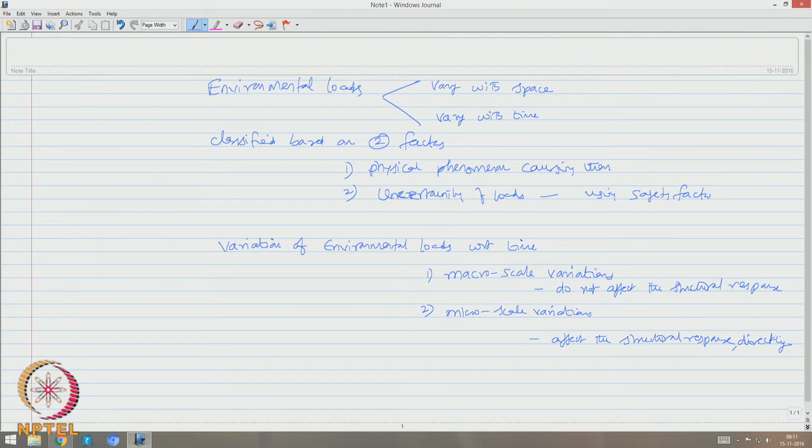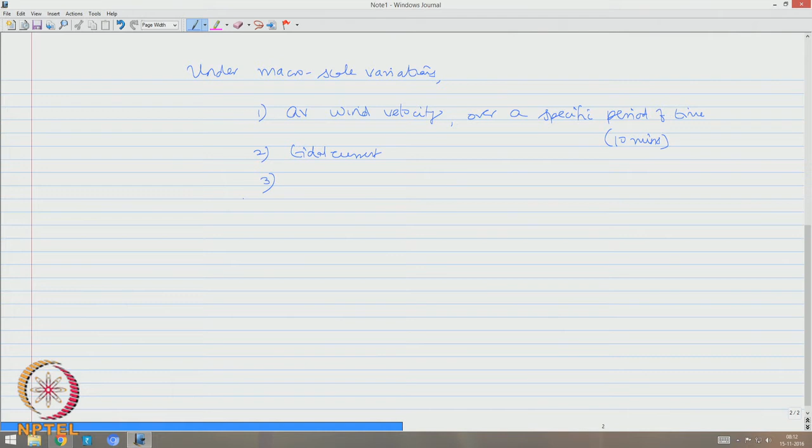Under macro scale variations, we can give certain examples. Let us say average wind velocity over a specific period of time; usually this duration of loading is about 10 minutes. The second variation in macro scale could be tidal current, it could be significant wave height, and peak period of the wave spectrum.

The fourth could be peak ground acceleration of the earthquake motion. So, they all come under what we call macro scale variation. They do not actually have direct influence on the response of the structural system.

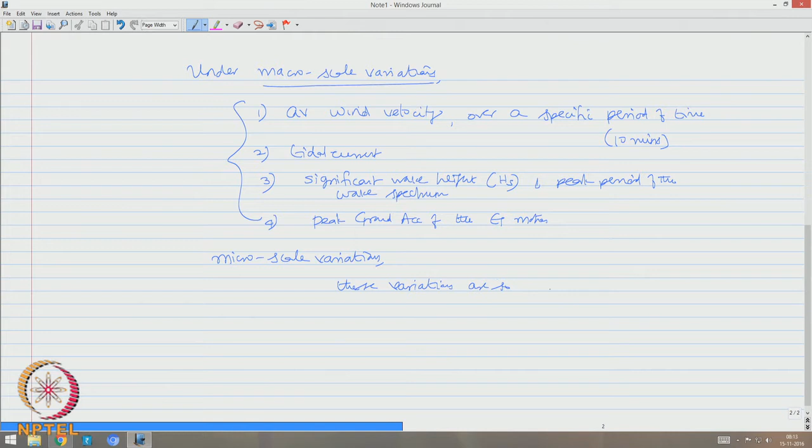On the contrary, if you look at microscale variations, these variations are so rapid that it makes significant influence on the response of the structure, let us say in our case the platform. Generally, microscale variations give rise to dynamic effects on the platform.

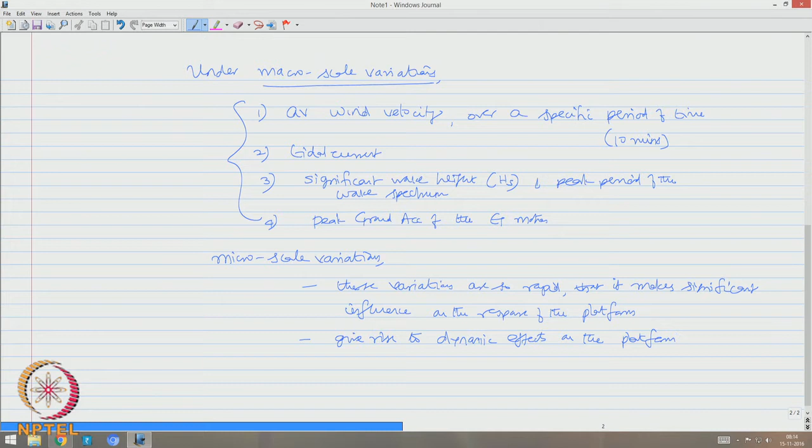Let us enter conventional environmental loads. Let us talk about wave loads. The wind generated sea surface waves can be represented by a combination of regular waves. So, what may be a combination? Regular waves of different amplitude, different period and different wave directions are combined to represent the wave load acting on offshore platforms.

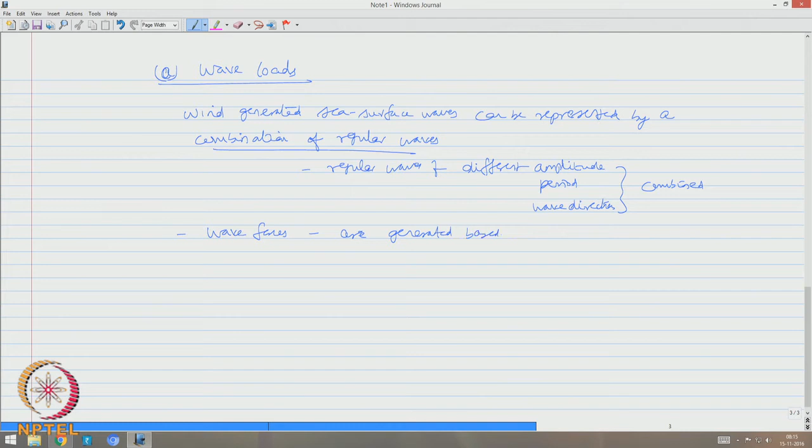The question comes, how actually they are represented? Wave forces are generated based on the water particle kinematics like horizontal water particle velocity, horizontal water particle acceleration, vertical water particle velocity, vertical water particle acceleration. The foremost theory which we all know is Airy's theory. This is also called as linear wave theory.

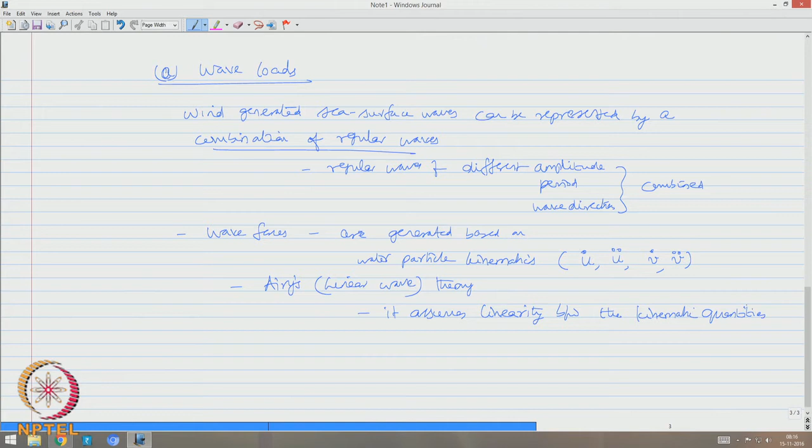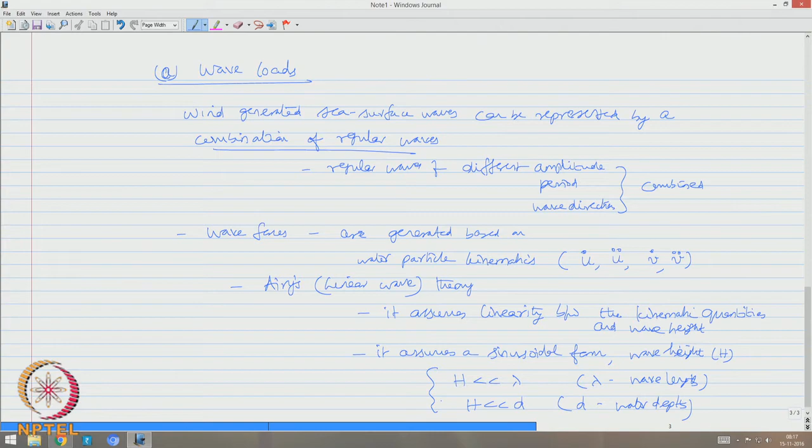Because it assumes linearity between the kinematic quantities and wave height. It usually assumes a sinusoidal form with wave height h which is very small compared to wavelength lambda, and very small compared to water depth. So, these are some basic assumptions which classify Airy's theory as linear wave theory.

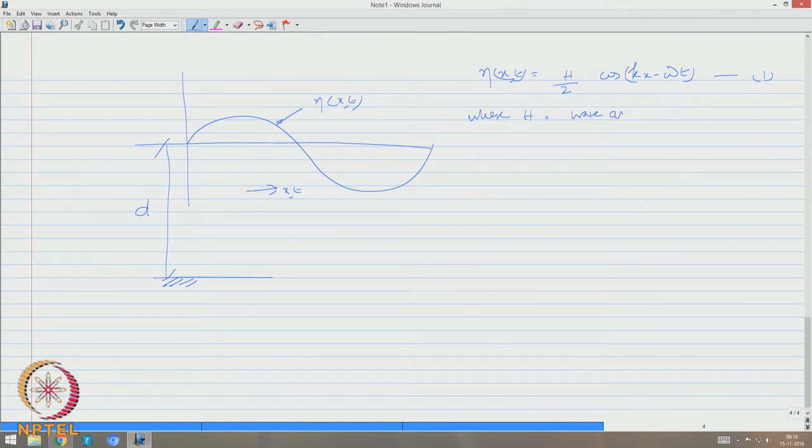So, according to this theory, if the sea surface profile is explained as a sinusoidal wave, with the water depth represented as small d, the sea surface elevation eta, where x and t vary in space and time, is given by, where h is the wave amplitude, k is called wave number, which is generally given by 2 pi by lambda, where lambda is called wavelength, which is approximately 1.56 T squared, where T is called wave period,

omega is wave frequency, which is 2 pi by T, and Cp is called phase speed, which is omega by k, which is lambda by T. Once I know the sea surface profile, as the water particle moves horizontally in x with respect to space and time t, because of the wind action on sea surface elevation, they generate horizontal water particle velocity and vertical water particle velocity, let us say in meter per second.

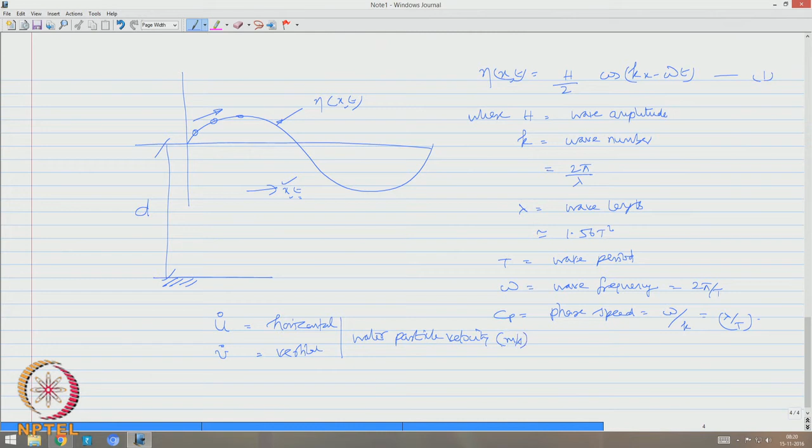Horizontal water particle velocity is given by omega h by 2, cos hyperbolic k y by sin hyperbolic k d, cos (k x minus omega t). Vertical water particle velocity is given by omega h by 2, sin hyperbolic k y by sin hyperbolic k d, sin (k x minus omega t).

Differentiating this with respect to time, we get horizontal water particle acceleration, which is omega squared h by 2; of course cos hyperbolic k y and sin hyperbolic k d will remain unchanged. There is a minus sign and that becomes sin (k x minus omega t). There is another minus sign with this omega, that becomes plus an omega squared. Whereas v double dot of t is minus omega h by 2 sin hyperbolic k y by sin hyperbolic k d of cos (k x minus omega t).

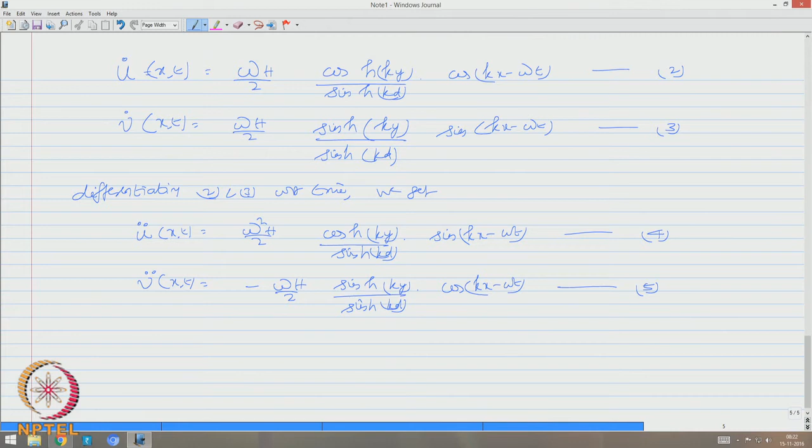So, there are some limitations where this theory can be applied. Airy's theory is valid only up to mean sea level, but interestingly there is a complexity here. When you have a cylinder or a leg of a platform whose diameter is very large, there may be a possibility part of the wave may be in submerged position with respect to the cylinder. So, there is a possibility that the cylinder may occupy a position which may be in the trough part.

So, the differential submergence effect of the cylinder with respect to the mean sea level is not accounted. So, we call it variable submergence effect, because Airy's theory computes the water particle kinematics only up to mean sea level. The variation because of the sea surface elevation with respect to the mean sea level is not accounted in Airy's theory.

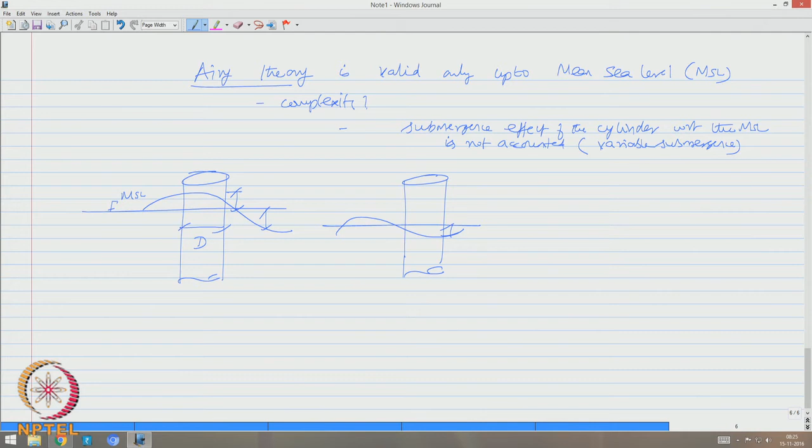In that case, the solution is, people have used something called stretching modifications. This will account for water particle kinematics up to the actual level of submergence.

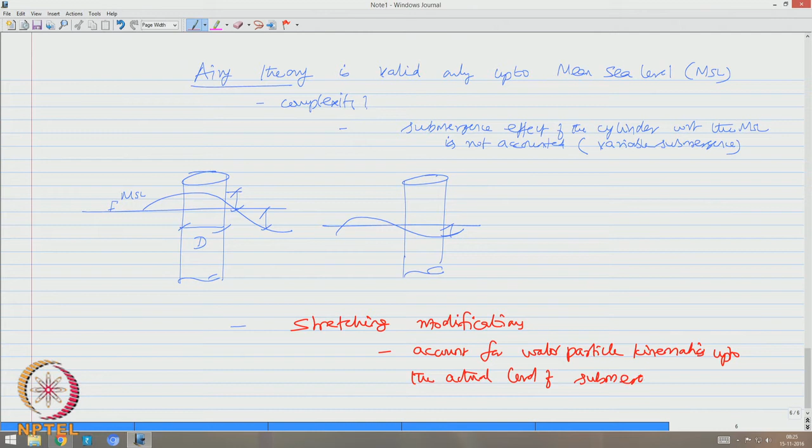Before that, let us see some classical definitions, which again show complexities in defining these wave theories. There are some classifications in the literature as deep water, shallow water and intermediate water depth. The classical definition says, if the water depth is greater than lambda by 2, where lambda is the wavelength, then we call this deep water. The characteristic of deep water is that phase speed, Cp, that is omega by k, is independent of depth under this condition.

Shallow water, classically, is when the water depth is less than lambda by 20. The characteristic of this is that phase speed depends only on water depth, but it is not a function of lambda. In case of intermediate water depth, the definition says it is between these two values. In this case, phase speed will be influenced by both water depth and period or wavelength.

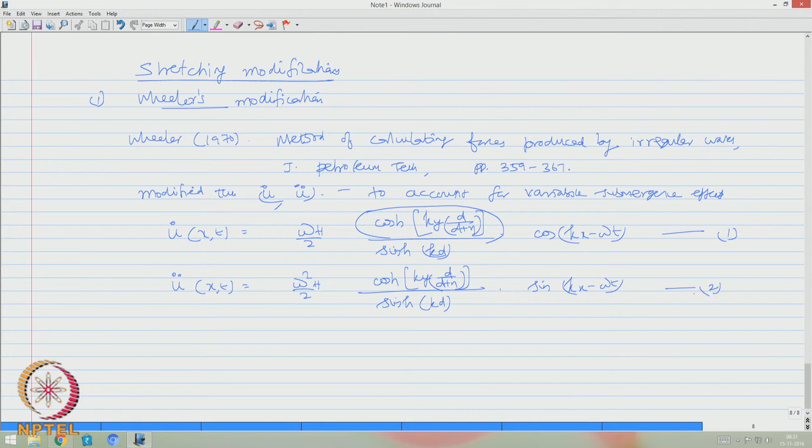So, you can very well see this is the modification which has happened, and the acceleration part: omega square H by 2, cos hyperbolic k y d by d plus eta, sin hyperbolic k d, sin k x minus omega t, where this is my sea surface elevation, y is measured from here, this is my sea bed, this is my water depth d, and this is eta, the sea surface profile, which is used here.

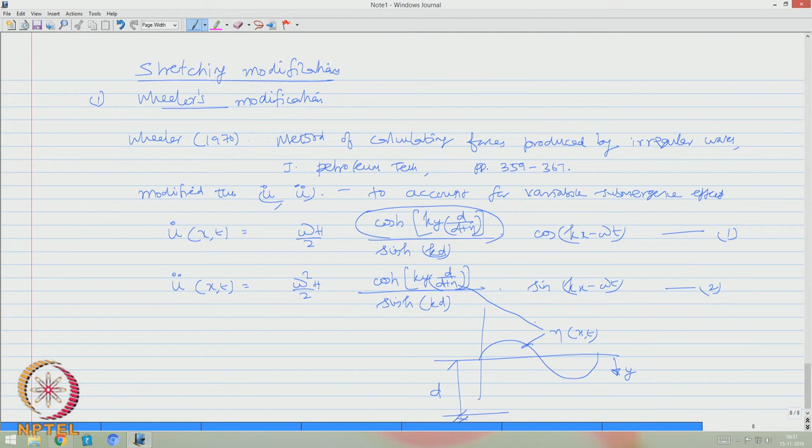The second modification was given by Chakrabarti, called Chakrabarti's modification. This was given by S. K. Chakrabarti in 1971: Discussion of dynamics of single point moorings in deep water, Journal of Waterways, Harbour and Coastal Engineering Division, ASCE 97, WW3, 588 to 590.

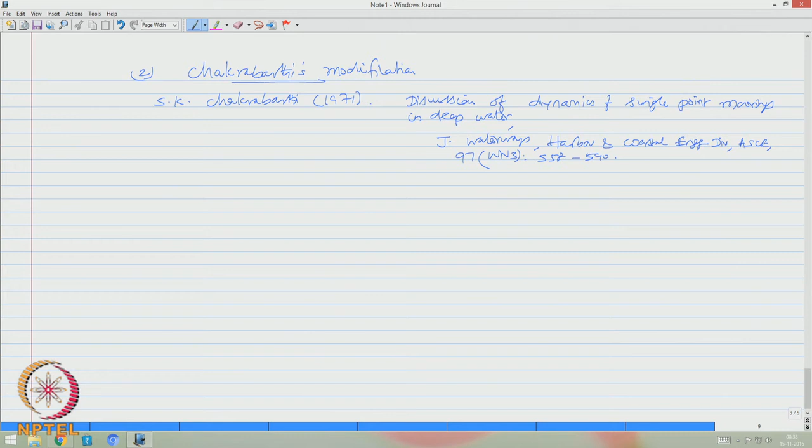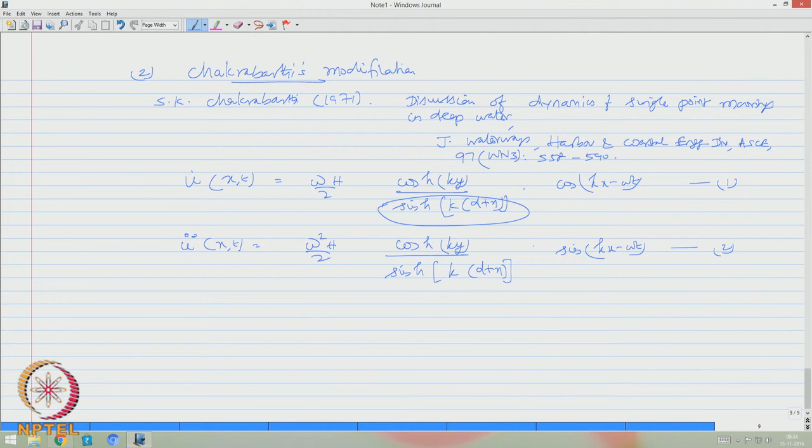According to this modification suggested by Chakrabarti in 1971, the horizontal water particle velocity is modified as this. So, the modification is in the denominator as you see from this equation, differentiating to get the acceleration. We get two equations suggested by Chakrabarti's modification. Now, interestingly, let us extend this discussion to understand the further complexities in wave loads.

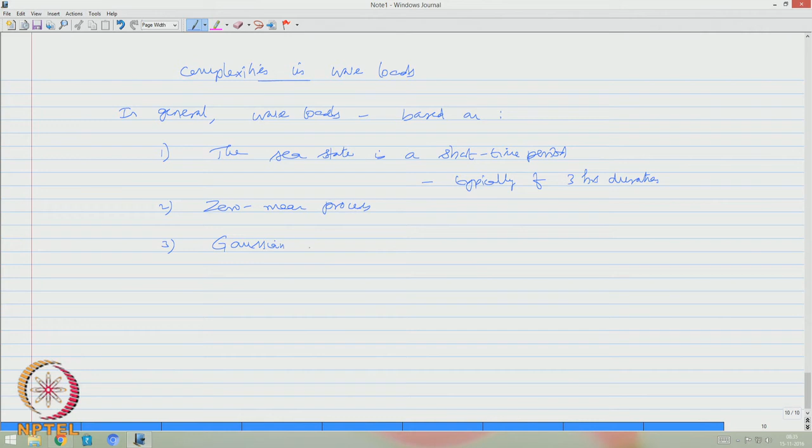In general, when we calculate wave forces, wave loads are assumed to be based on a classic theory saying the sea state is a short time period, short in the sense of typically 3 hours. Duration is an idealization. It is also assumed to be a zero mean process, following a Gaussian distribution, and it is said to be an ergodic process. Short time period is defined for a specific duration. To some degree, as engineers we accept this.

Zero mean process is essentially the statistical distribution of the wave height, where the amplitude is equal with respect to a mean line. So, let us say this is my mean line. Gaussian distribution is useful because the statistical properties associated with it are important in estimating the characteristics of the wave loads. Let us talk more about these two to understand the complexities. Now, to understand ergodic process and stationarity in a given wave load, let us take an example.

Let us say I have a wave stream which is varying in amplitude, time and direction. So, this is my t, and the vertical axis is eta 1 of t. Let us take another history, again t, with eta 2 of t on the vertical axis. Let us take one more time history, t, with eta 3 on the vertical scale. We are in the process of explaining ergodic process.

So, what is ergodic? Ergodic is a special stationary process which has the same mean square value as that of the unique mean square value. So, ergodic is a single sample. So, out of the samples eta 1 of t, eta 2 of t, eta 3 of t, etc., you can pick up any sample. This particular sample chosen for your analysis is called ergodic when the mean square value of the sample is exactly the same as that of the unique mean square value which we found out at intervals of tau along the entire ensemble. So, this is one of the basic assumptions we have in terms of estimating wave loads on offshore platforms.

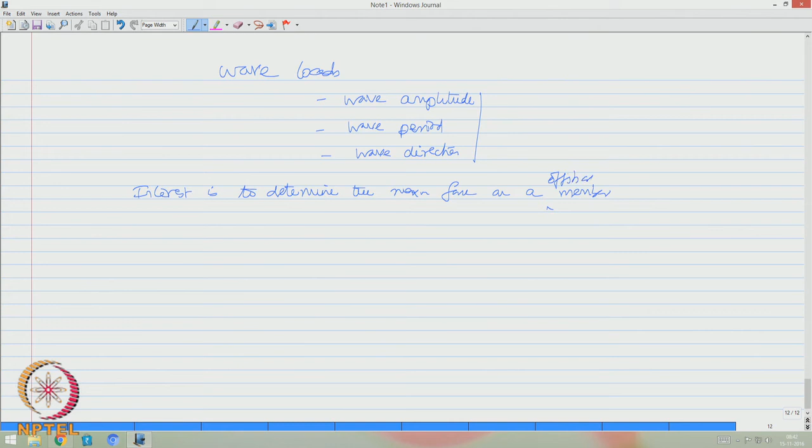The issue that now comes here is that wave loads have wave amplitude as a variation, wave period as a variation, and of course, wave direction as a variation. One is interested to find out the maximum force on a given member. So, the interest is to determine the maximum force, maybe on a member, let us say on an offshore structural member. Okay. How to do this?

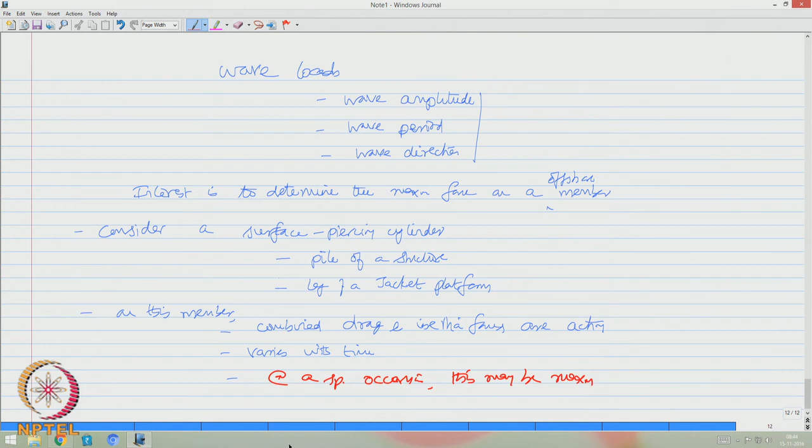Consider a surface piercing cylinder. An example could be a pile of a structure, or the leg of a jacket platform. We know that on this member combined drag and inertia forces are acting. Both of them vary with time. And it is interesting that at a specific occasion this may be maximum. So, one is interested to know that maximum load. Therefore, in order to find the maximum force, the phase angle at which this will occur should be first determined.

So, we all know that the total force on the pile member arises from the velocity and acceleration components of the water particle. Let us obtain this force vector and integrate it between the boundaries. So, the boundaries within which we should integrate this are from the sea surface to the seabed, that is 0 to minus h.

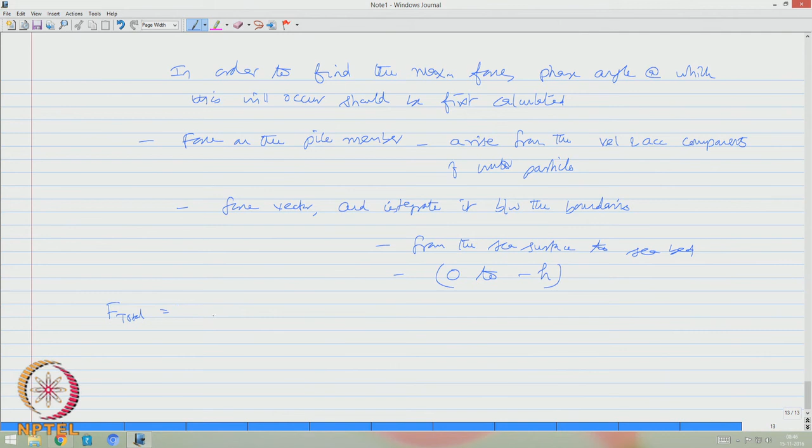So, the total force is given by half rho Cd D pi square H square by T square cos theta by sinh square kh, times sinh 2kh by 4k plus h by 2, minus Cm rho pi D square by 4, 2 pi square by T square H sin theta by k. This equation is obtained by substituting the horizontal water particle velocity and acceleration as obtained by Airy's theory until mean sea level without considering the stretching modifications.

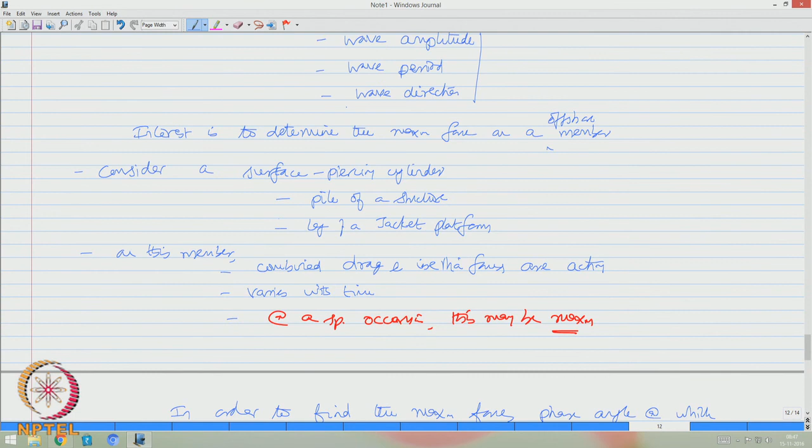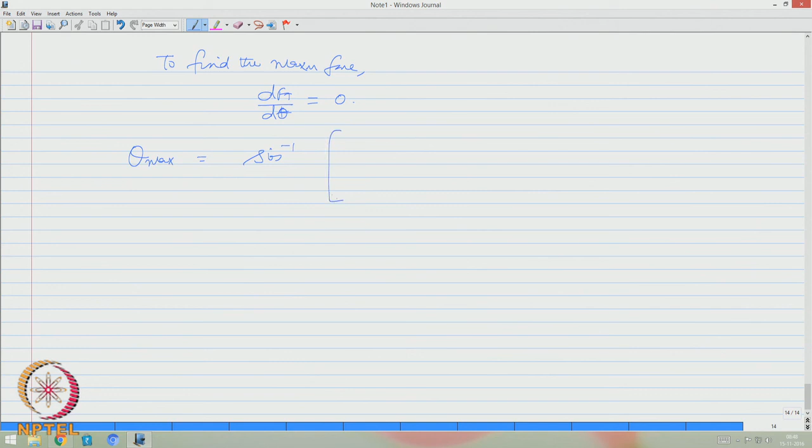To find the maximum force, I should find the differential of this and equate it to 0, because we know the variation of the total force is with respect to the angle theta. So, once we do this and substitute, I get theta max as sin inverse of minus pi D by H, Cm by Cd, twice of sinh square kh by sinh 2kh plus 2kh. Once I know the maximum phase angle, then by substituting theta max in equation 1, one can find F total, which is going to be the maximum. So, this will have a specific occasion where both inertia and drag forces are maximum for a given offshore cylinder.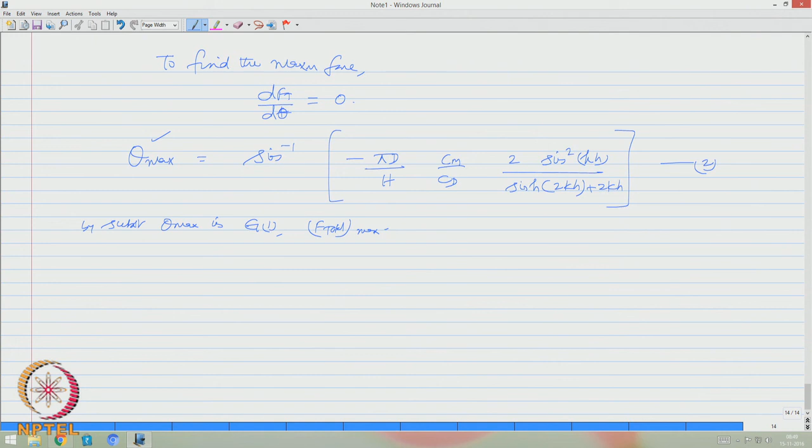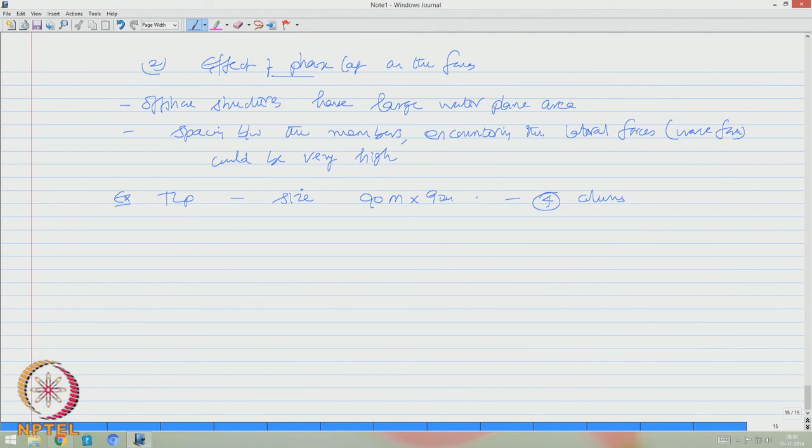The second complexity which arises in computing wave forces on members is the effect of phase lag on the wave forces. Interestingly, offshore structures have a large water plane area, which means that the spacing between the members encountering lateral forces, in this case the wave force, could also be very high. Let us take for example a tension leg platform. We say the size of the platform is about 90 meter by 90 meter, resting on 4 columns. So, if this is the plan of a TLP, and this is my x axis, the center to center distance between the legs or column members is about 90 meter in the wave direction.

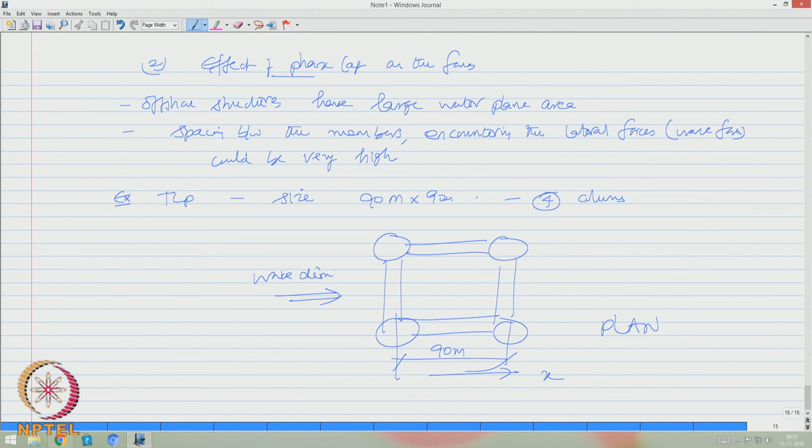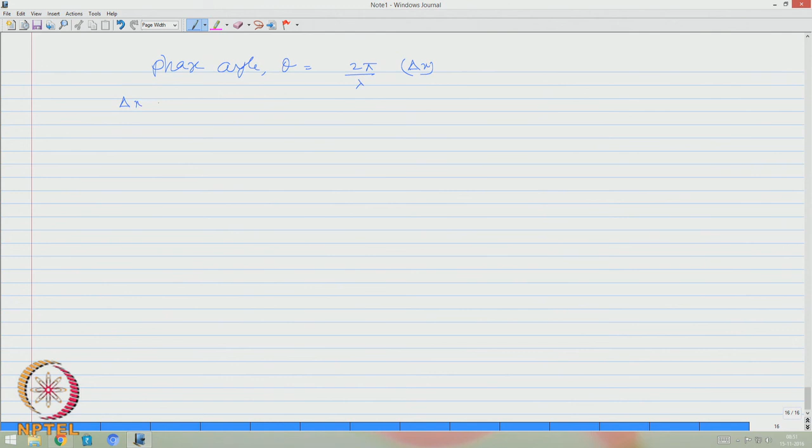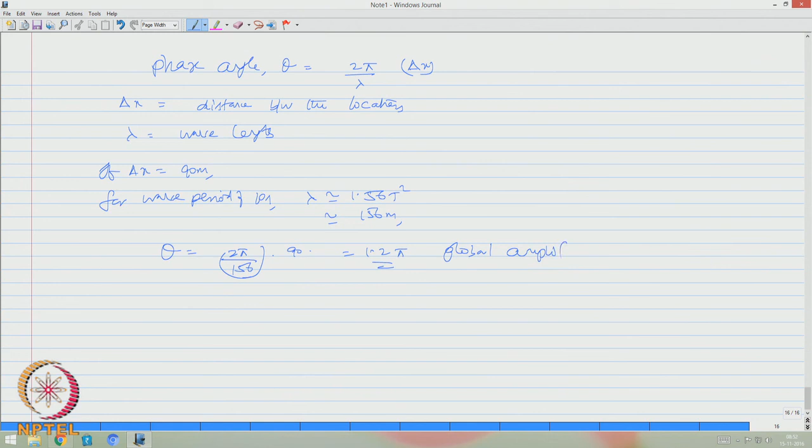So, therefore, the phase angle theta could be 2 pi by lambda delta x, where delta x is the distance between the locations where the wave encounters the structure, and lambda of course is the wavelength. So, if delta x is 90 meter, as in the case of the TLP example, and for a wave period of 10 seconds whose lambda is approximately 1.56 T square, which is 156 meters, then theta actually is 2 pi by 156 into 90, which is about 1.2 pi, which can have a global amplification. It may result in cancellation of forces, because it is 1.2 pi.

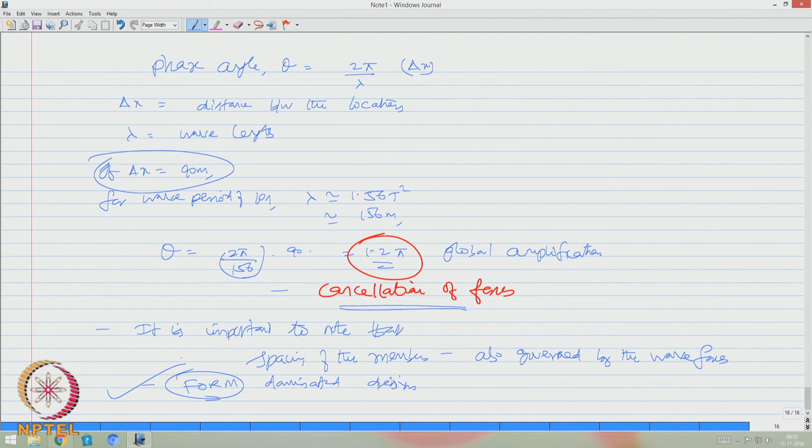What does it mean? It is important to note that the geometric spacing of the members is also governed by the wave forces acting on them. Please understand, that is why I said offshore platforms are form dominated design. It is not that you assume a structural form and then find the stresses or forces on the member. You design the structural form, in the sense the spacing of the members, such that the wave forces on the members get cancelled. So, it is form dominated design. So, it is very interesting that one can intelligently use the choice of spacing of the members, so that the forces acting on these members can compensate each other.

So, friends, in this lecture we discussed the complexities of conventional environmental loads. We picked up wave loads for discussion, and we saw how wave loads and stretching modifications can be found from the ready equations, and we also slightly understood the complexities that arise because of the phase angle and other factors that influence the forces on offshore members.